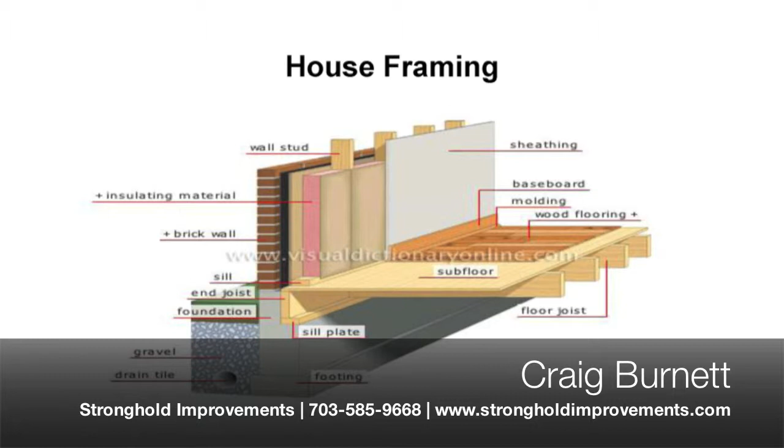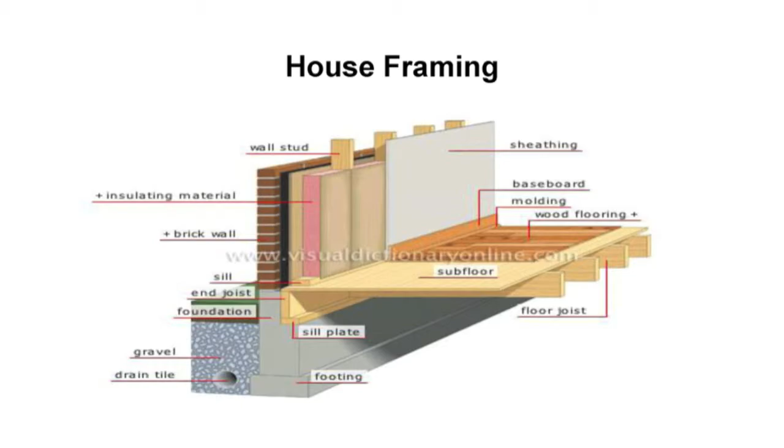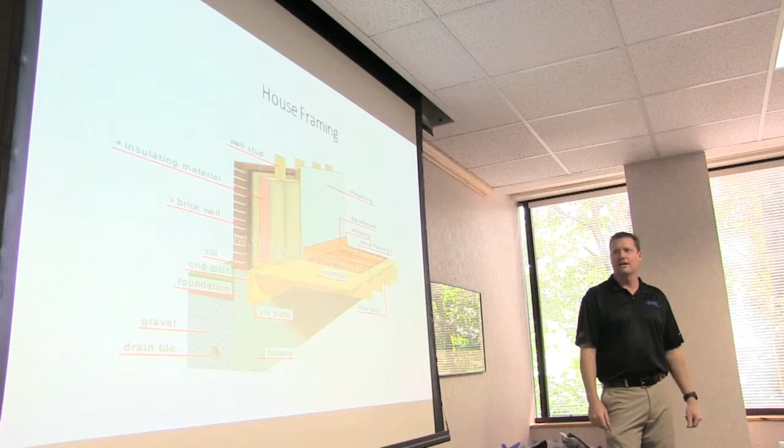So again, you know, the foundation, and then with the framing, the studs and the joists and the subfloor and all that kind of stuff. That's just really for your reference, if you're going to keep that handout. But there are metal studs, there are wood studs. There are a number of different ways to frame a house. The two most popular are...

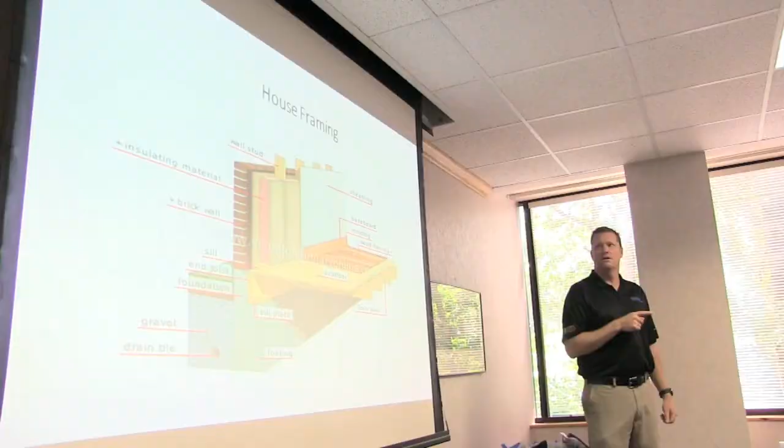Oh, I put this one in there for you too, okay, terminology. What makes a rough opening? What is a header? The header is up above any window or door. Can you not read it? No, we can't read it on here.

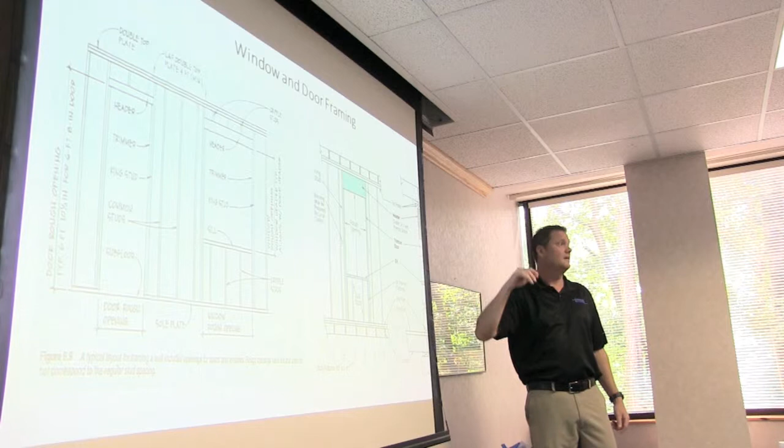200%, yeah, that's okay. Again, I put that in there just kind of for your reference, so when you're talking about the difference between a cripple or a jack and a king stud and headers and things like that. I don't see a difference.

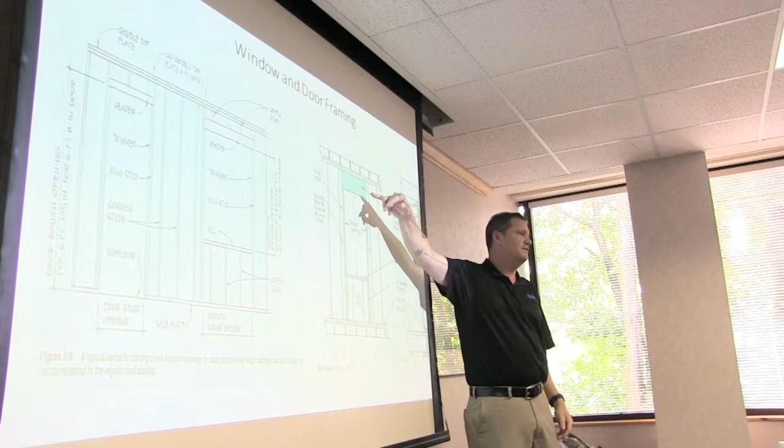Well, you don't want to talk about what kind of studs are up above a window when it's actually called a header, and the size of the header, because this is supporting all the weight that's up above this window. The window is not structural, okay? Or the door is not structural, it's designed to open and close, not to hold up the wall. So the size of the header depends on what is up above it. Is it brick? Is it stone? Is it regular framing? Is it the roof? Is there nothing up above there? Is it a single family, is it a rambler where there's just 2 feet and then the roof kind of thing? So, okay, again, it's just being able to talk like a contractor when you're with a client.

Not like most, hey, yo, contractors. But again, it's more about, I don't know, being in sales, where it's all about how you present yourself.

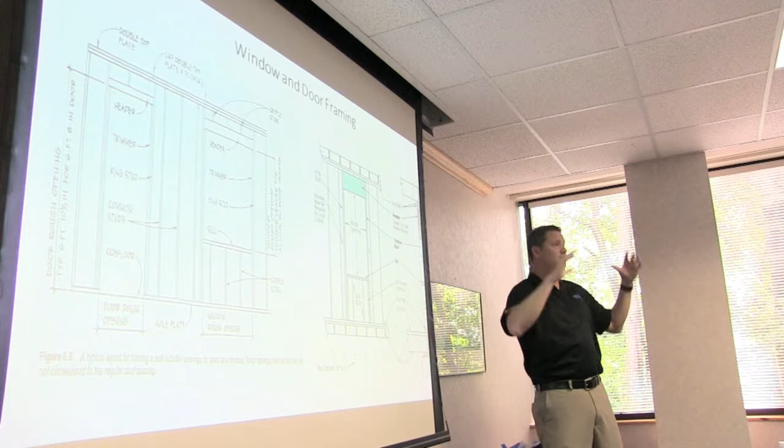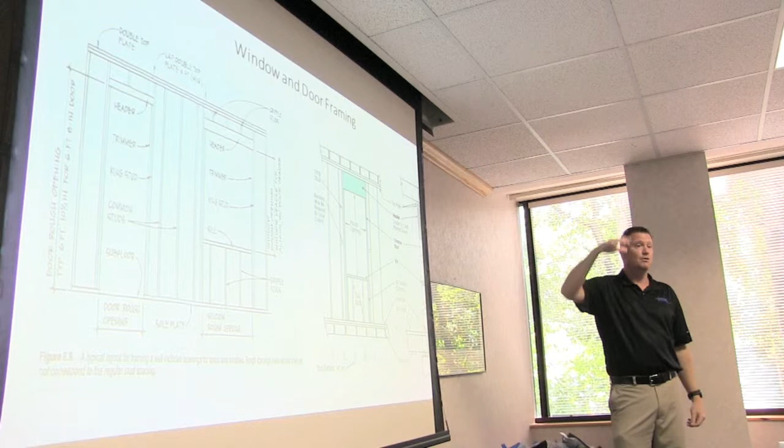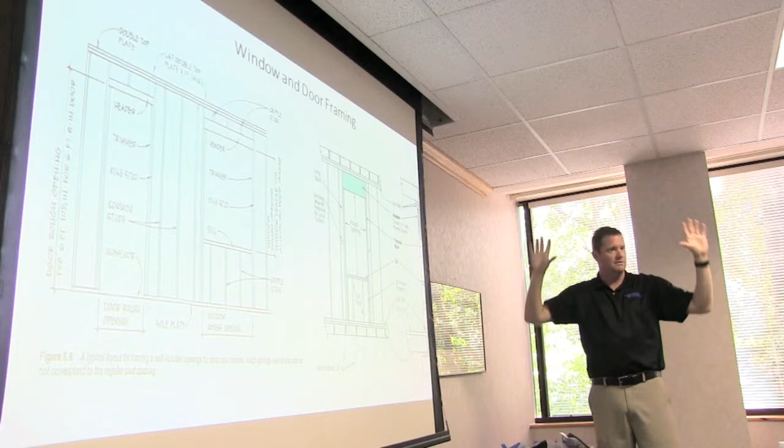And you don't have to, it's knowing a little bit about a lot of stuff. You don't have to be an expert. All you have to know is, listen, that header, obviously, if we decide to take this single window and turn it and cut a massive hole in the wall and make it a big picture window, we're going to have to make sure that we change the header out, because that header right now is only designed to carry this much weight. If we go this wide, not only do you just cut the wall and put the window in, but you got to cut everything up top, figure out how to carry the weight, and then maybe it might take more of the king studs, okay? Things like that. Know enough that you don't, and to realize that you don't know everything.

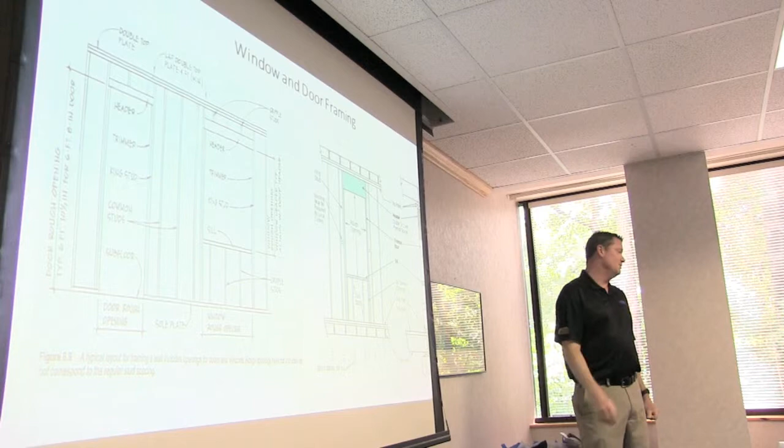That's what my dad always said. Is there an indication how to tell if a wall is load bearing or not? Sure. You learn. Yeah, you learn.

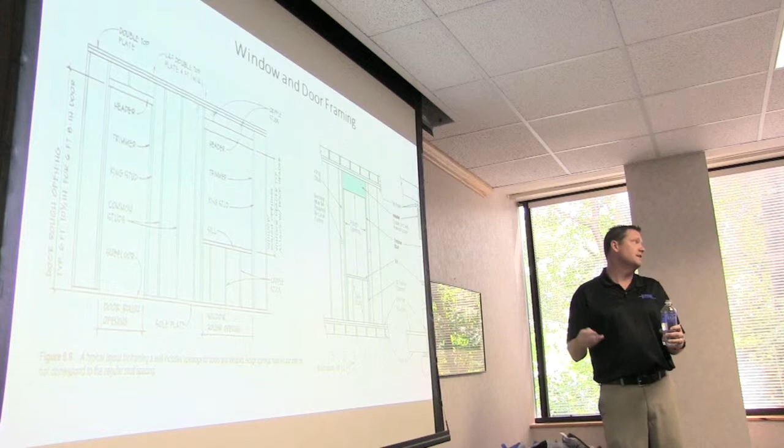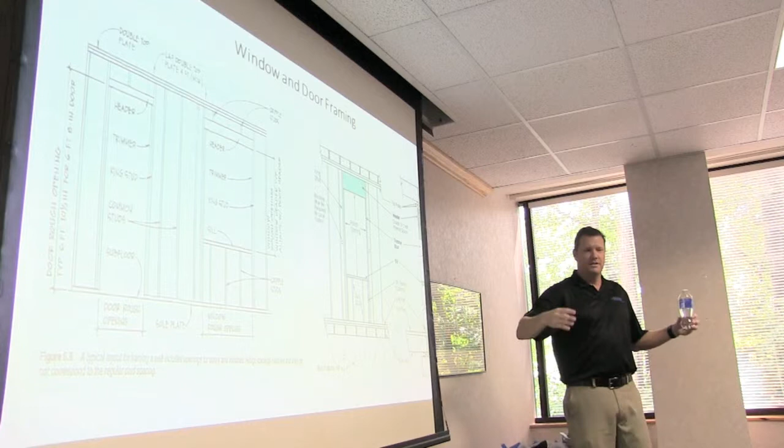Well, it depends on the layout of the house. I can walk through and figure it out based on where the trades are running and where chases are and where openings are and things like that. Because I can build a house this way, the other builder could build the exact same house that way. It depends on how it's drawn and the engineers and things like that. So, best thing is to just call me. Typically if it's running down the center of the house, there are beams. The outside of the house, they're considered beams, so they're load bearing, obviously.

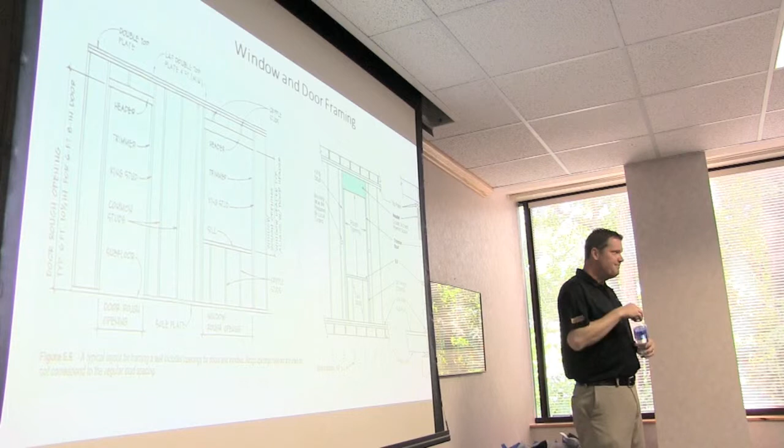If there's one structure running down the middle, there's probably a beam in there - that's a load bearing wall, whether it's on the first floor, second floor, or down at the bottom. A lot of times you can go into the basement and see where the beams are. If it's an unfinished basement, you see where the I-beams are. I think that's a main question agents have - people always want to open up that wall. But that's the easiest thing, go in the basement and see where the beams are going, see where the posts are, because your load-bearing walls are going to run right up above those.

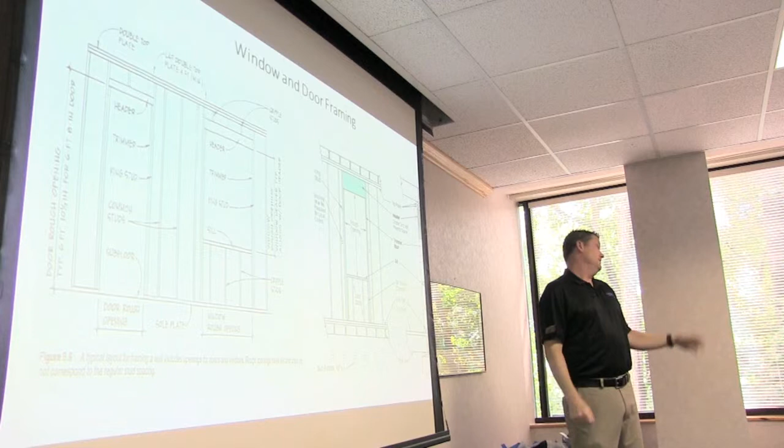My typical answer is anything can be done. There's not much to it - depends on what the county will let me do, and how many zeros are in the check.

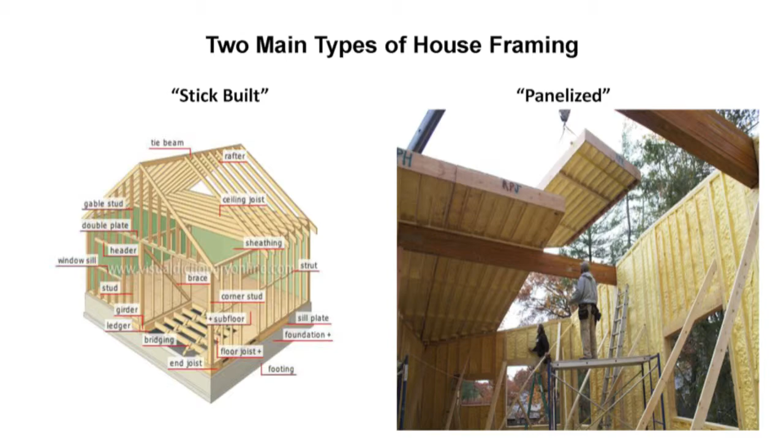So the two main ways to frame a house: it was stick built, which is you just have a pile of lumber delivered and you have finished carpenters come in and put the thing together. Now what they do is engineer the roof trusses and things like that, which makes it a lot quicker and easier if you are going to stick build it. Some builders prefer to stick build because they can make changes on the fly - have a client come through and say, I don't like that small window anymore, I want the big one, okay, we can just take it down and redo it.

The panelized method is getting very popular, mainly because of the speed at which you can get a house under roof. Depending on the size of the house and the crew, you can usually have a house under roof in a panelized situation in 2 days. It's like a jigsaw puzzle. There are local companies around here that do it - they build it on a big assembly line, panel A, panel B, panel C, and you just put it together. Boom, boom, boom, and that goes together.

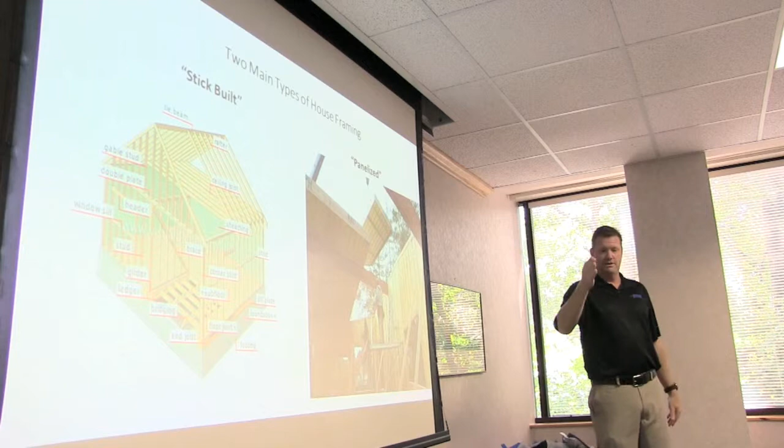Does it have the same structural integrity as the stick built? Absolutely, my understanding is it's actually better because you've got more code inspection watching after it. You don't have to worry about a county inspector missing this or that. The theory is everything gets inspected, and every panel, even when we're doing panelized, doesn't include all the trades or any of the electrical or anything like that.

So an inspector still comes through and checks all the trades. At that time, if you call for a plumbing inspection, that inspector has the right to inspect anything. He can turn and look at the framing and say that's wrong, and fail your framing inspection. They're not there just to do the plumbing - they have the right to walk on site at any point and perform an inspection, even if you don't request one. It's happened many times before.

But the nice thing about the panelized method is, if you stick build something, it's going to be weeks, usually. And the issue is water. Even if you get the walls built, the roof sheathing on, and the felt paper on there, the wood is going to get wet.

Black mold - I'll talk a little bit about black mold. Everybody knows what it is, it's still a huge issue. There's actually rumors of a class action suit coming down against DuPont for the use of Tyvek. Again, that's the rumor. So from what I understand, in a stick-built situation, you get everything framed up, you put on all the sheathing, which is the plywood on the outside, you get the thing under roof.

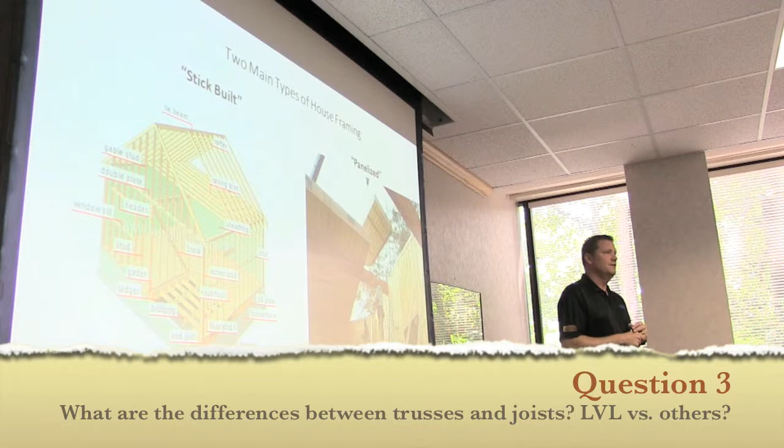Sure, there are a number of different types of lumber out there used for different applications, each with pros and cons. There's ground contact lumber that is pressure treated, specifically designed to sit in the ground, and it has a higher concentration of copper. They don't use arsenic anymore. Everybody knows the old pressure treated used arsenic, and it's a carcinogen. So now they use copper, which drove the price of pressure treated lumber through the roof. There's more copper in ground treated lumber than in regular pressure treated lumber.

Same thing with structural lumber. They have number ones, number twos, number threes, and it's all based on the number of knots and the size of the knots in the lumber, because a knot is very strong, but it has the potential to fall out and compromise the structural integrity of that board.

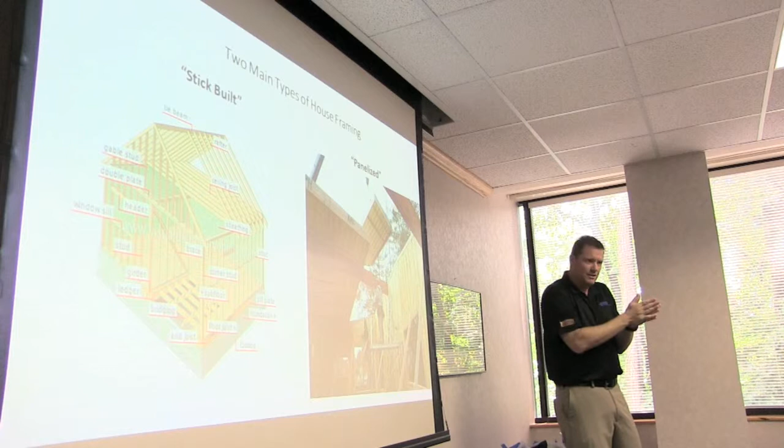Then there are steel beams and what are called LVLs, which are engineered wood. It depends, everything is based on your engineering drawings. Know enough to realize you don't know everything. You have an engineer come in and he'll say use a 12-foot, 6-inch LVL for that span, and that's what you put in there. You can also double up or triple 2x12s, 2x10s, 2x8s, but usually all the structural elements have to be number one lumber, very few knots, based on the number of knots, the spacing, and the size.

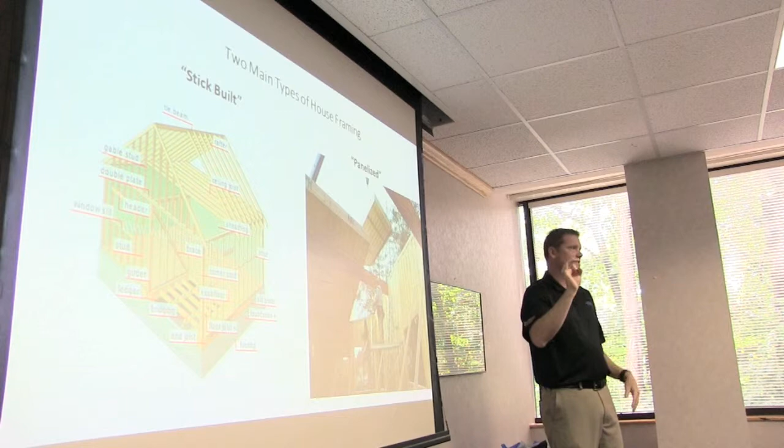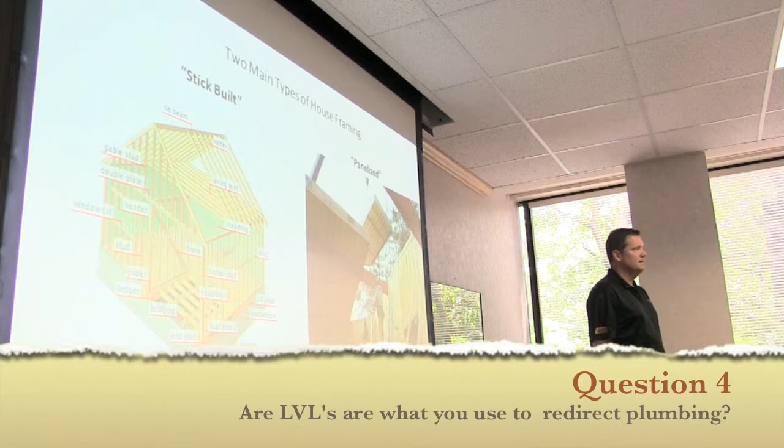Are the LVLs the ones where you're able to knock out holes to redirect plumbing and stuff without compromising the structure? Yes, there are in the LVLs, but it depends. It's the same thing, it depends on the size of the LVL, or even a 2x12.

You're allowed to drill holes in a 2x12, 2x10, or 2x8, depending on the size of the hole. If you're running plumbing, you've got to use a 2x12 because it's a 2-inch hole for a 1.5-inch pipe, and it has to stay a certain distance off the bottom and off the top, so you have a really narrow channel to drill those holes. If you're just running electrical wire and drilling a 5/8 hole, you can drill it through a 2x8 because it's not going to compromise the structural integrity of that board. That's why I hire engineers. I have a highly educated guess, but I'm not going to let my house stand on guesses. Same thing with trusses.

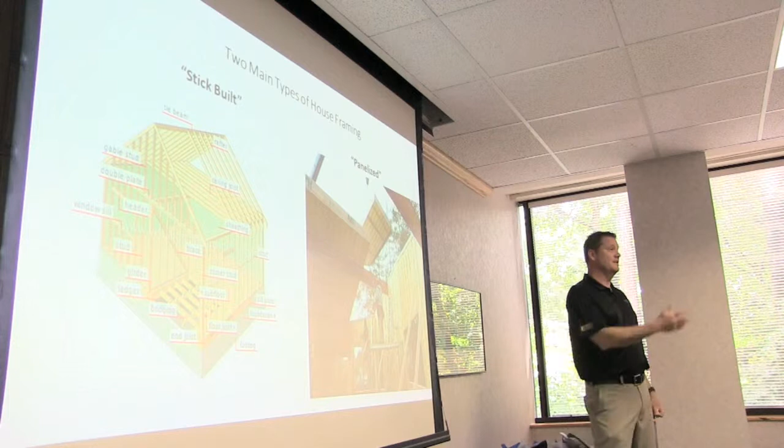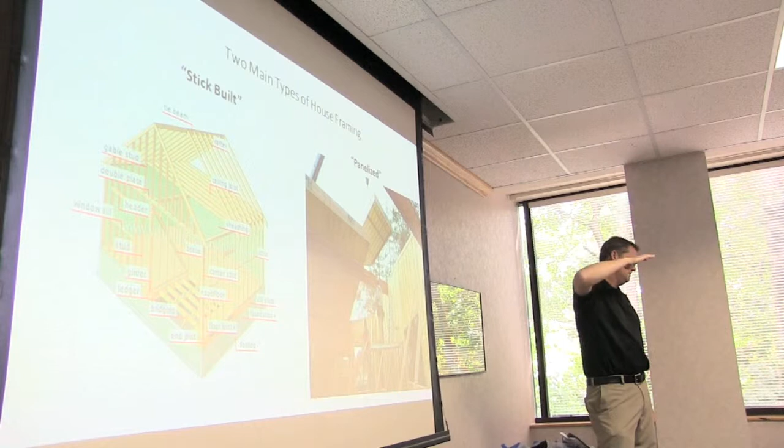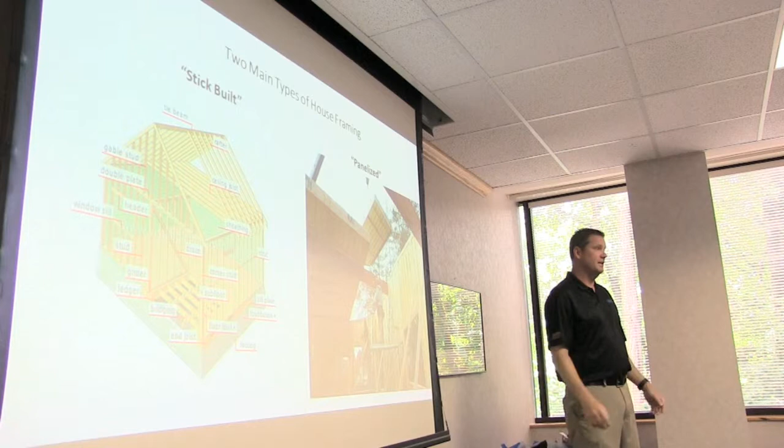There are finished carpenters that will come in, and if it's a straight gable roof, that's very easy to do. But if you start getting into hip roofs and attics where you want attic space, you have the trusses engineered, and a truss company will build it and drop it right on site. It's the same thing—it's a puzzle, A, B, C, D, E, F, G.

Yeah, I love the panelized stuff.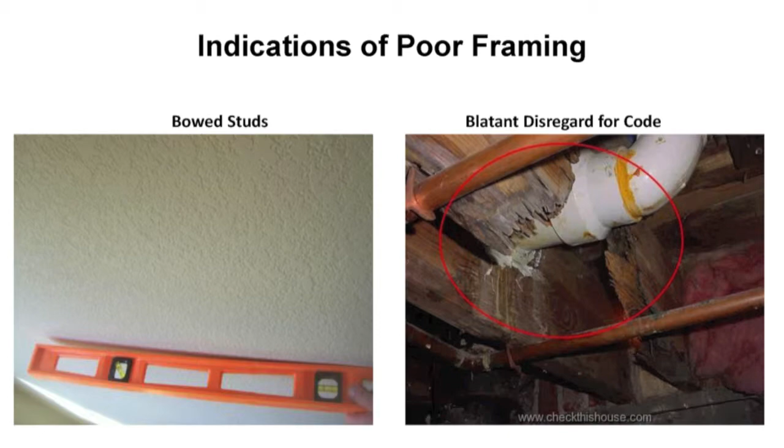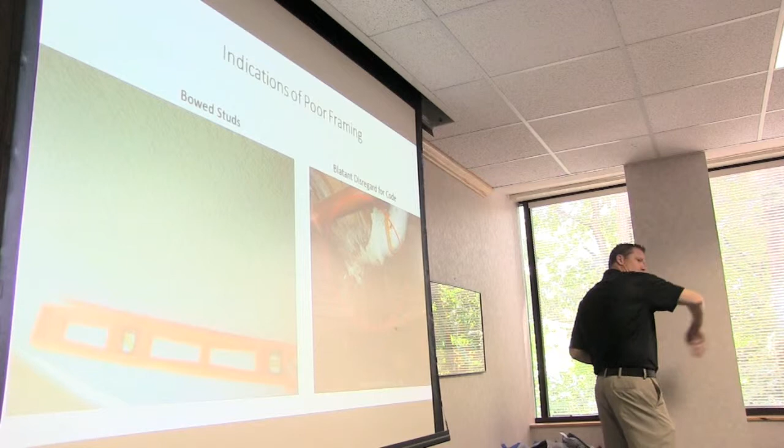So, indications of poor framing. I don't know if you can really tell here, but it's a level on a wall that's already been finished, unfortunately, and the wall bows. Once the drywall's up, it becomes very difficult to do. So what I do is I take a 6 and an 8 foot level and put it up against the wall, and if it rocks, I know that stud is too high—too far towards me if it's in the middle—or I look back there to see if things bow. You really have to be aware of those things, but that's about all you can do.

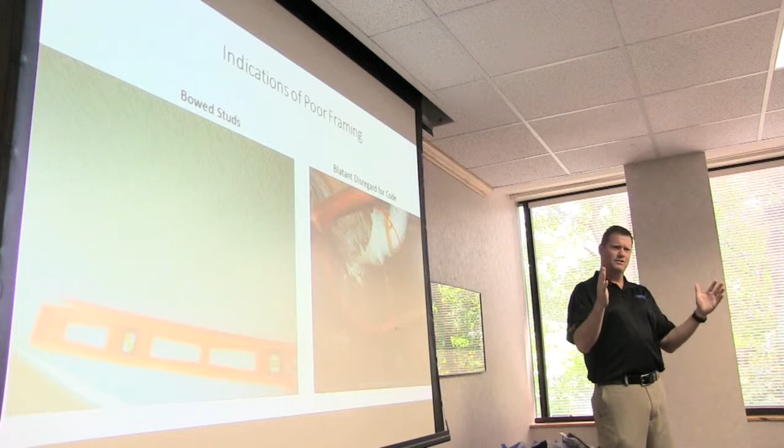Once everything's finished, have a level in your car. Invest in a 4-foot level—you don't need the big ones I carry in the back of my truck. Have a 4-foot level you can use on a doorway to see if it looks a little funky, like something's settling over there, or on a wall to check if it looks bowed. It's a great way to show your knowledge and that you're prepared for something like this.

Good for floors too. Many times you walk into a house and visually you're like, I'm pretty sure that's not level.

Bring a golf ball or a marble, whatever.

And then obviously, if you're in a basement and you see holes that just seem way too big, they eat up too much material. Common sense comes into play a lot—Joe Homeowner decides to move his toilet and drills a massive hole in a 2x10, and there's nothing left of the board in that spot. Those are the kind of red flags where you say, that's not right, we're going to get somebody in here. Call AmeriCode, or call me, or call somebody to come inspect it.

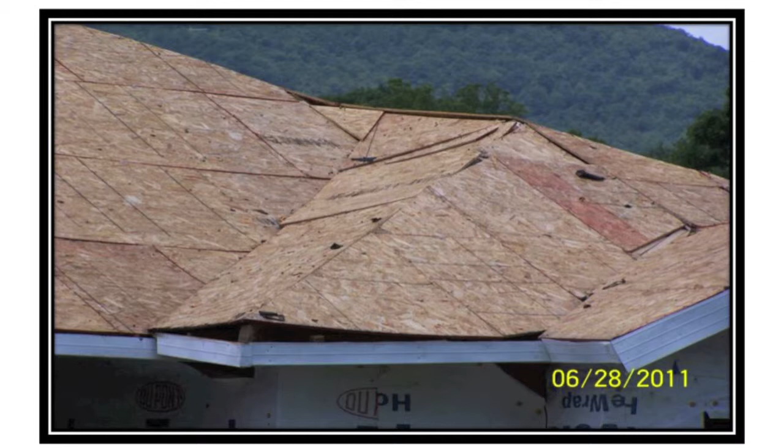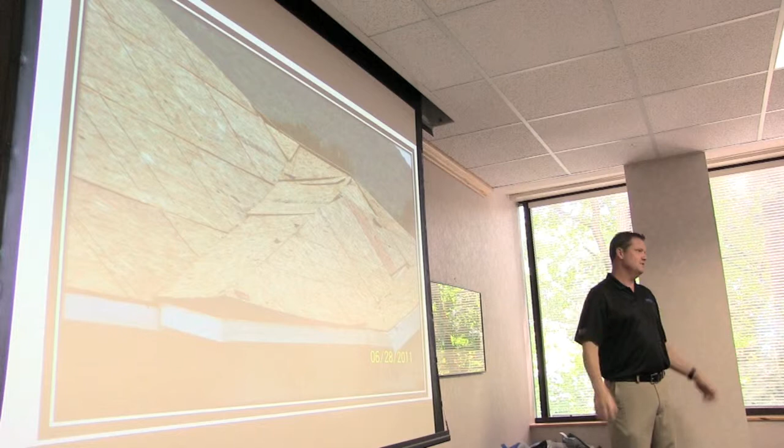If you don't catch it early, that's what you end up with. I think that's supposed to be some sort of hip roof, or there's an alien spaceship hiding underneath there. If you don't catch this early in the process, it becomes a 30-year nightmare—not only for you, but for the agent too, because what's going to happen is the homeowner says, holy moly, Tom sold me this house and the roof leaks like crazy, I've put $10,000 into fixing it, what the heck. No matter what, once you touch it, you own it. We all know that, right? So that needs to be caught early, in the framing process and in the drawings.